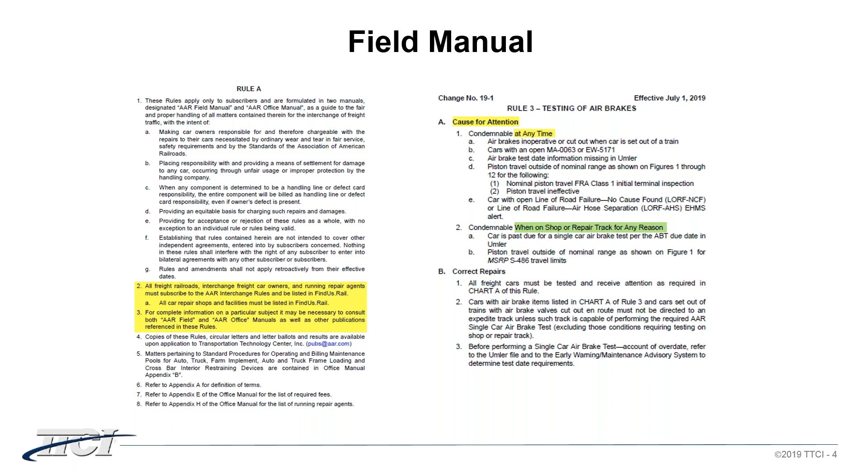Now, as we keep going through, Section B talks about correct repairs. So you've got the rules. You have Section A that tells you this is when you need to repair it. This is when it's on a shop or repair track. These are other items that have to be corrected when they're on there.

We go to Section B, correct repairs. What needs to be done? What has to be done when it's there and you're working on the car. And they may refer to different sections in the field manual, and it also may refer to different publications.

Now, we look at the rule here, Rule 3. It's telling you that when a car is on a shop or repair track, you have to do a set and release minimum, and it's telling you what the set and release is and the steps. And it tells you that if you're going to be doing piston travel or adjusting piston travel, you may need to refer to the S4009 or 4010.

It also refers to air brake tests and setting piston travel. It also refers to the S486. So there's a whole bunch of references throughout the rules. You take a look at it, and they give you discussion points. It gives you where you need to go to find the information.

If you've been doing it for a while, you may not have to go back and look at the S4009 or the 4010 because you're familiar with how to set the slack adjusters up and what it takes. So it tells you these things.

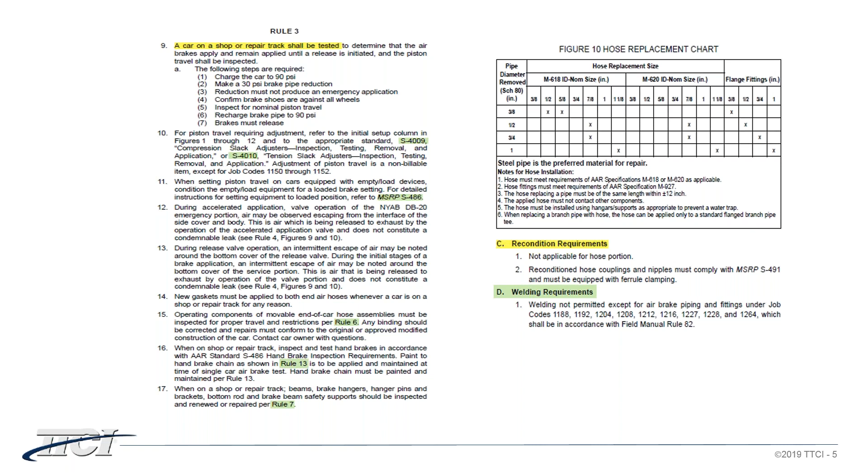And then as we keep going through the book and looking at the different rules and the different sections in there, Section E is general information. It's telling you good information, required information. It's telling you if you do this, you also have to do something else, or you may have to look at this. In this instance, I've got highlighted there that charges for truck-mounted piston travel adjustments aren't permitted.

So it's giving you instructions. If you're doing a single car test and you're adjusting piston travel, then it's not permitted to charge for that. On the other hand, it's saying that the charge is permissible if you're doing certain other things. So you kind of have to read through the rules to see the information that's there.

The general information has a lot of good stuff in there. It may tell you all sorts of different information. So as you go through the field manual and start getting familiar with it, each rule is a little different.

Somebody who tells you that they know the field manual front to back, well, I kind of question them because there's too much information to know. The important thing is to know where to go to get the information.

You take a look at the field manual and you look at the rules for brakes, the rules for couplers, the rules for trucks and all of these other items in wheels. So you want to look at what the rule says, when you have to remove it, when you have to do items on the repair track, and you also want to look at Section E and B, correct repairs.

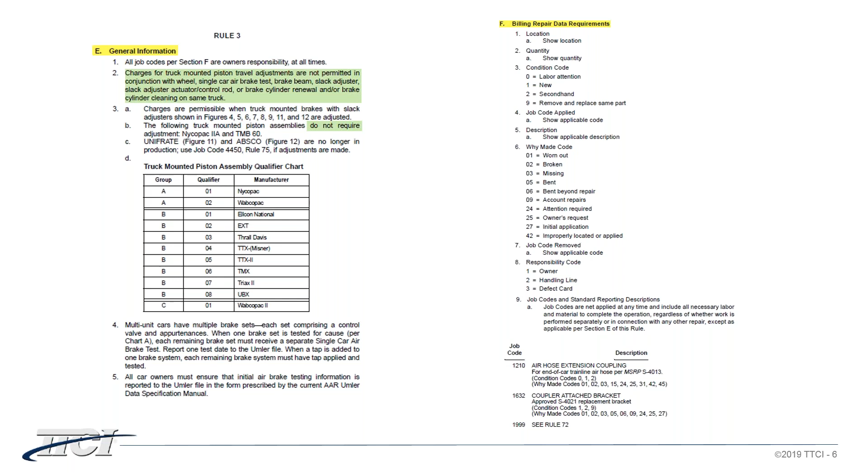We talk a lot about gauges. The AAR and TTCI have looked at gauges, and we found a lot of problems with the use of gauges, all the mandatory gauges in Rule 1. So someone came up with the idea of, well, can we put out a video just to show a quick demonstration? It's not a training video. It's just a video for reference. Oh yeah, this is how I have to do it. I remember how to do it now.

And this is just kind of a path on how to get to the demonstration videos that we've produced. You go to the AAR.com website. It'll take you to the Transportation Technology homepage. And there in the center, you'll see a tab that says Technical Services. When you click on that, it brings up another screen where you can go to Mechanical Inspections. And when you click on that, it brings you to a home page where you have on the left-hand side a couple more drop-down menus.

When you click on the field manual gauge use demonstration, it takes you to the home page on the right. And as you can see, there are some videos there. They're short videos. They're not there to train people. It's to refresh their memory. The field manual also gives you some pictures and descriptions of the gauges, how they look when they're applied. But the video goes a little bit farther. It helps you say, this is what you're looking for when you're doing this.

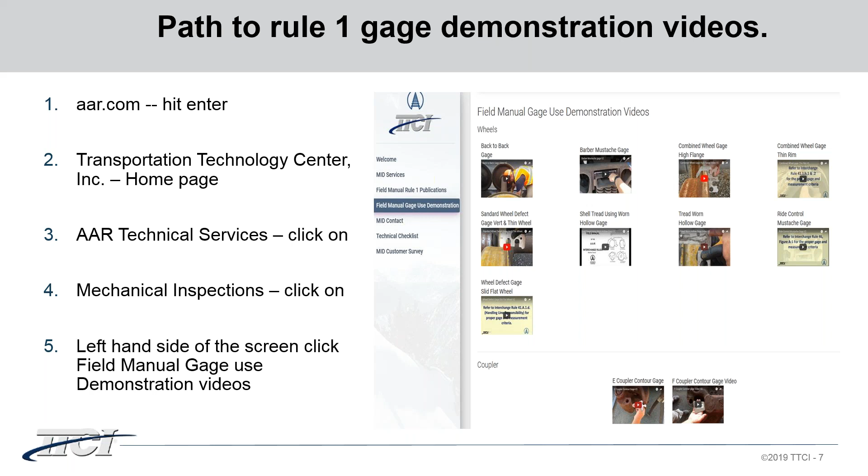One of the topics that we find recently in the field manual is information for the uncoupling levers and the lock lift clearance. There's a lot of information in the field manual, and this is a good example. It's there, and you kind of have to dig through to see what's needed. You've got fillers, you've got angles, you've got clearances. All of this information is in the field manual to help the end user, the guy who's going to be doing the repairs.

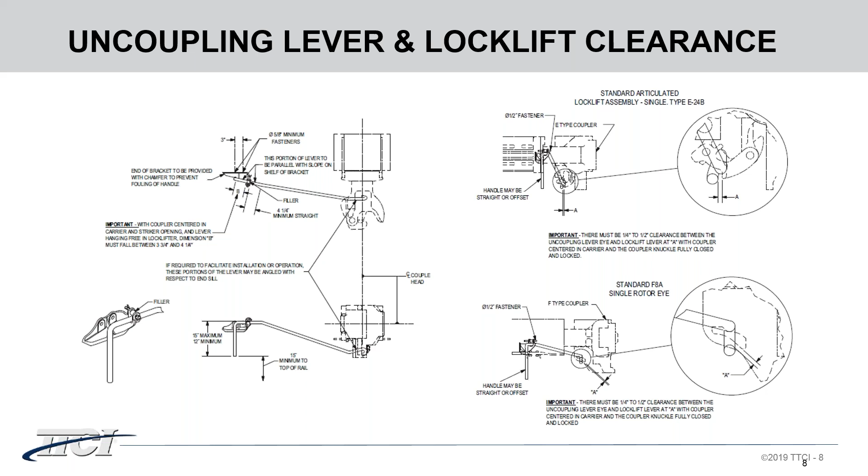It's also in the MSRPs, but this is where you really want it. This is where the person that's doing the work is going to look for the information. So as we go through, there's a lot of information, and you sometimes have to blow it up so you can read it because it is small print, but it is there to help the individual.

So we looked at this, and the castings committee said there have been a lot of problems with the uncoupling levers, lock lift clearance, also referred to as rod eye clearance, all sorts of nomenclature in the industry, depending on if you're in the East, the West, or down South. Everybody calls it something different. But the video is there just to help.

What we've done is we made a video, and we're hoping that it will help the industry. We've also made an update to this video, but this is one, and this is kind of what we're looking at. I'm going to take just a minute to show this to you so you can see what it is.

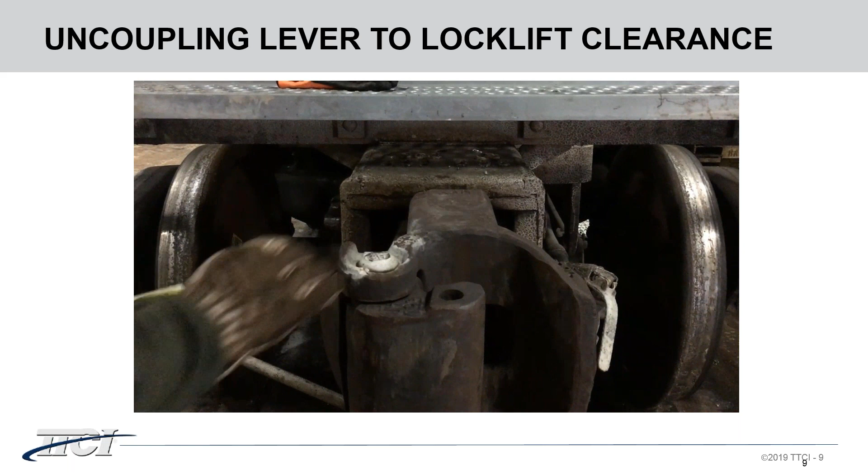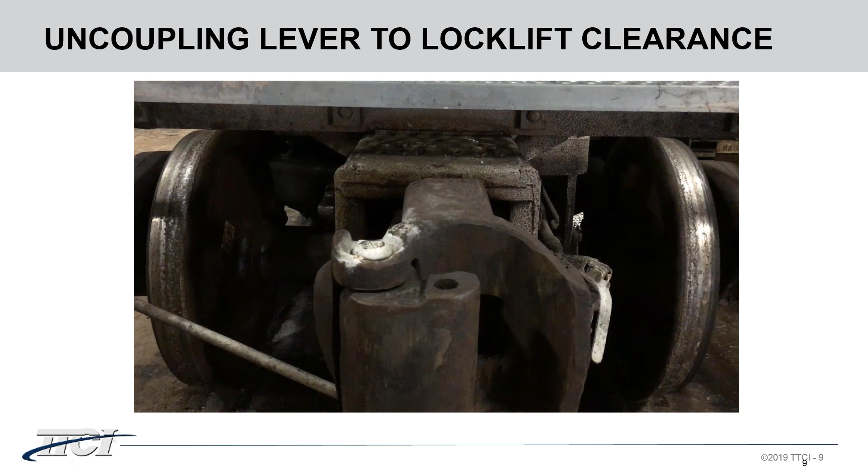So we're here to look at the E60 draft system, the uncoupling lever, to make sure it's the correct one, and the gap between the lock lifter and the uncoupling lever. So the first thing that we want to do is center our coupler on our striker, make sure it's right there in the center. The next thing we want to do is come over here and look at our uncoupling lever, make sure it's not bent, it's the correct one, and make sure it has a 1/2 inch fastener, whether it be a cotter key or a bolt.

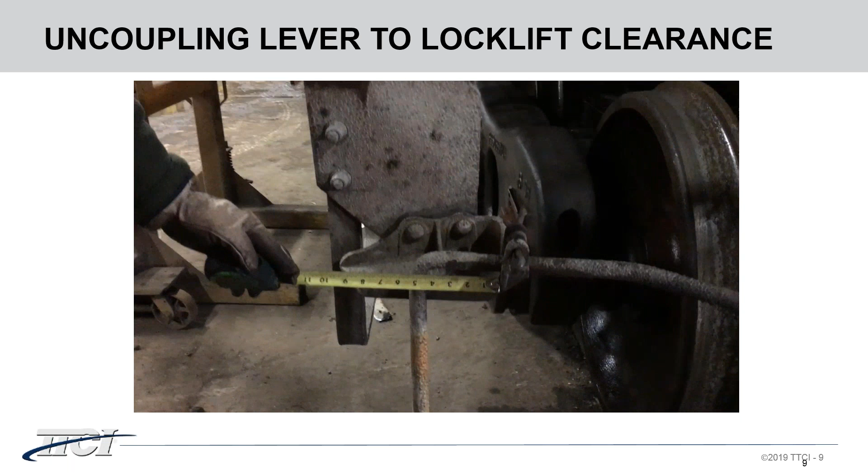The cotter key should be bent on the back side, and when it's on the repair track and shop track, it has to have the filler. So this one is correct. So the next thing we want to do is measure the distance from the bracket to the inside of the uncoupling lever. And we want to have 4 1/4 to 3 3/4, so it's right on the borderline 4 1/4. But if that was not in the 3 3/4 to 4 1/4, then we would either need to replace the uncoupling lever or adjust it. Some of them adjust, and then you have to weld it.

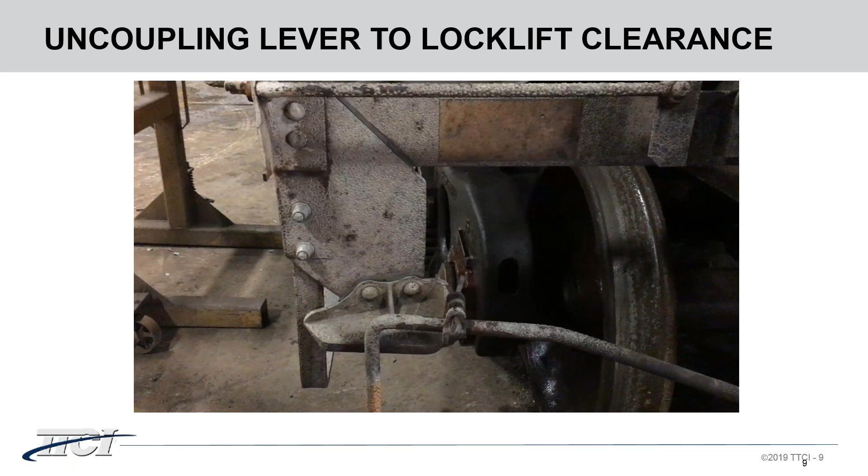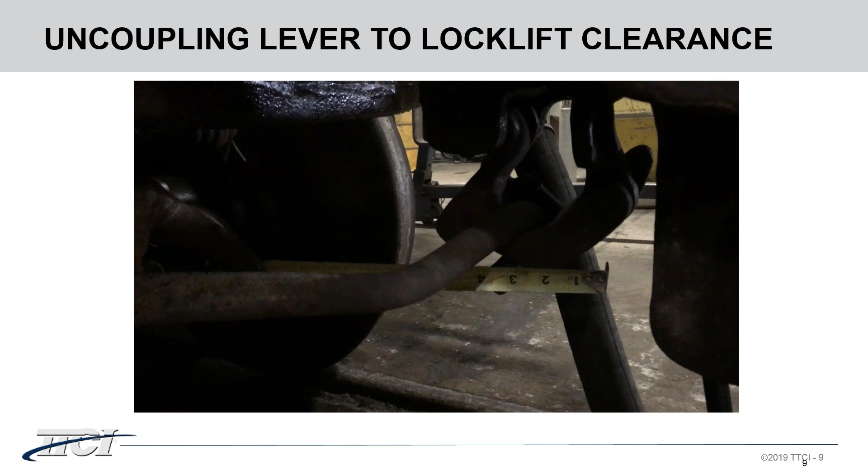So the next thing we want to do is check our gap between the lock lifter and the lock, and we're about 7/16 of an inch. And we're looking at quarter to half for that dimension. So if it's not between quarter to half, then it needs to be adjusted. These measurements are in the field manual in Rule 20.

So what we've got is just a quick video on what's going on and how to take a look at that. Again, all of these measurements, all of these items that you just saw in the video are in the rules. They're in the field manual, and you can take a look in the field manual. But a video sometimes puts it more into perspective on how to really measure it, where you're looking at this information. And we found that the videos do help, and this is one area that we're hoping to also get posted out there, either on the MID website, or Castings is talking about putting it onto their website. That's there as well.

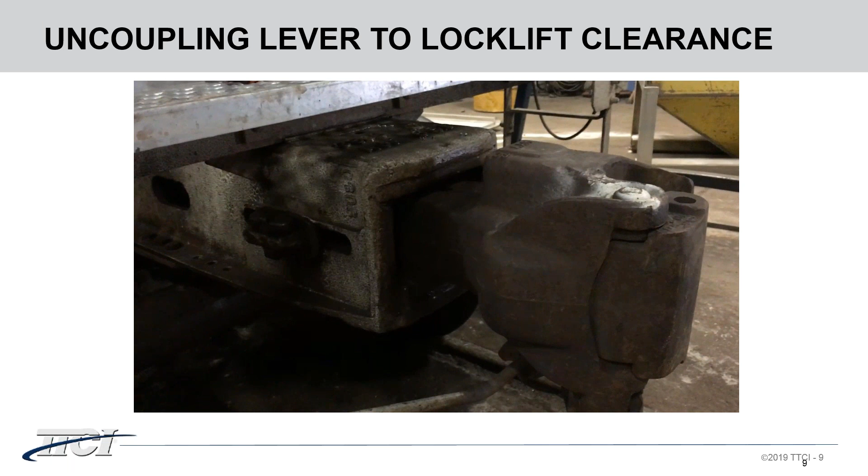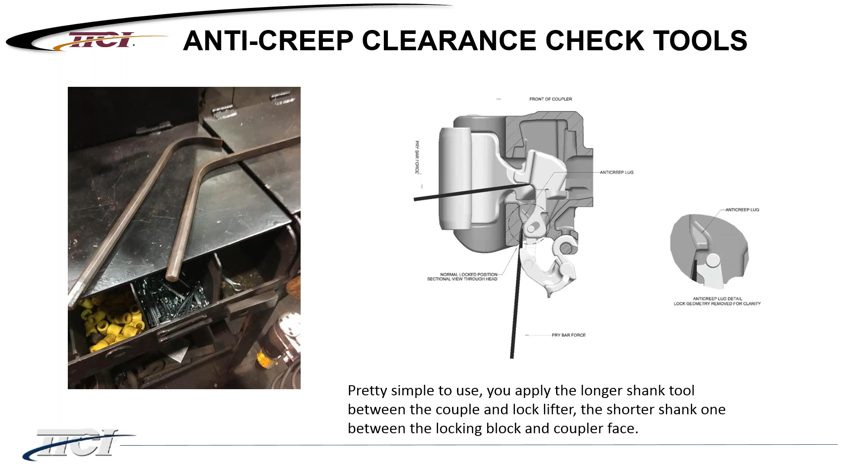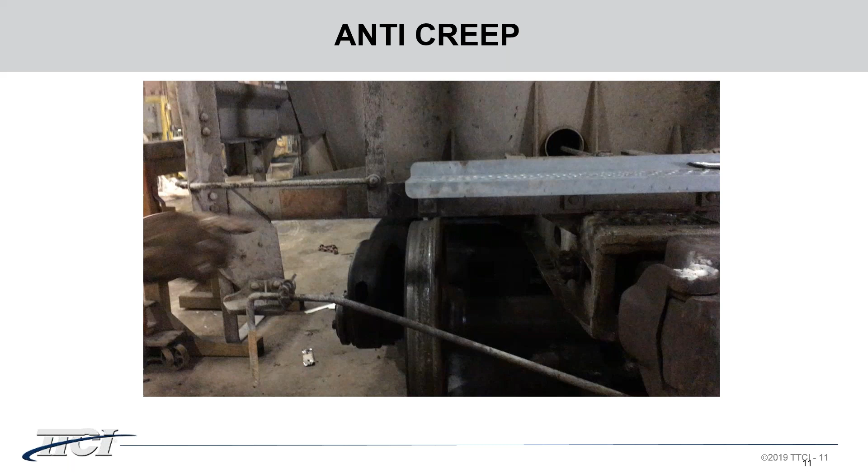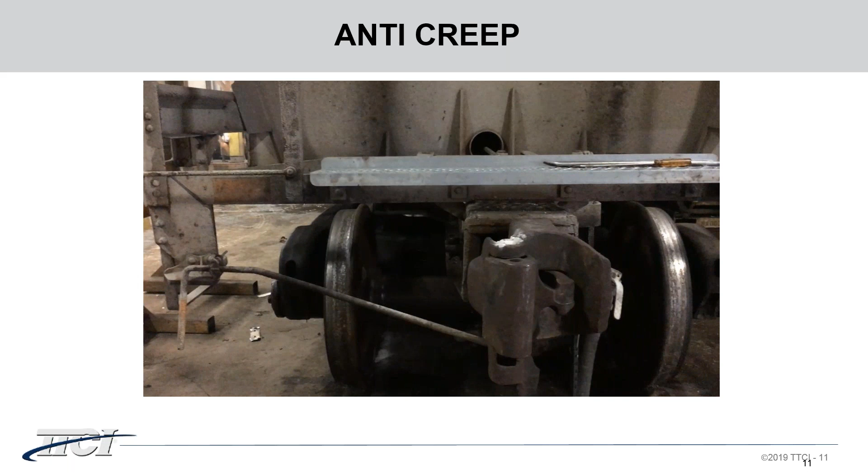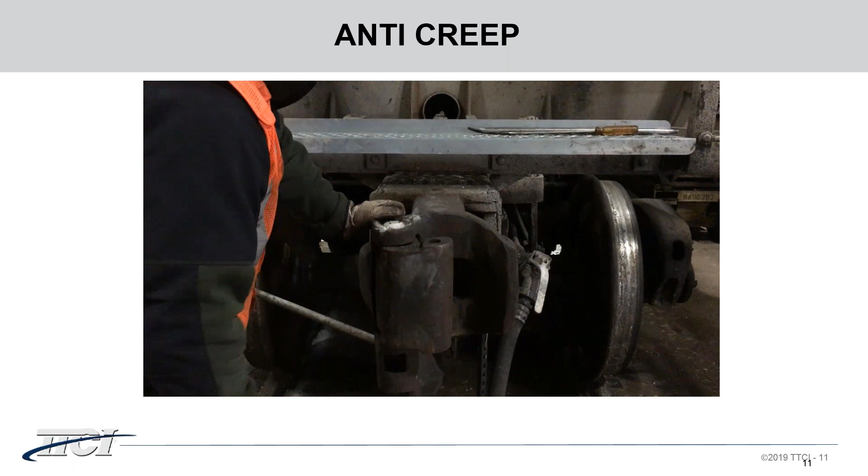And I'm going to take you through just another quick video of the anti-creep, and hopefully this will be useful for you all as well. We're going to check the operation of the coupler to make sure it operates properly, opening and closing. So we want to grab our uncoupling lever and make sure that the coupler operates fully in full open position, which it did. The next thing we want to do is close it and make sure our lock drops all the way to the full lock position. If it doesn't operate properly, then you can use dry lubricants to certain points of the lock and the thrower and the knuckle, and then try it. And if it still doesn't work, then we could replace some parts.

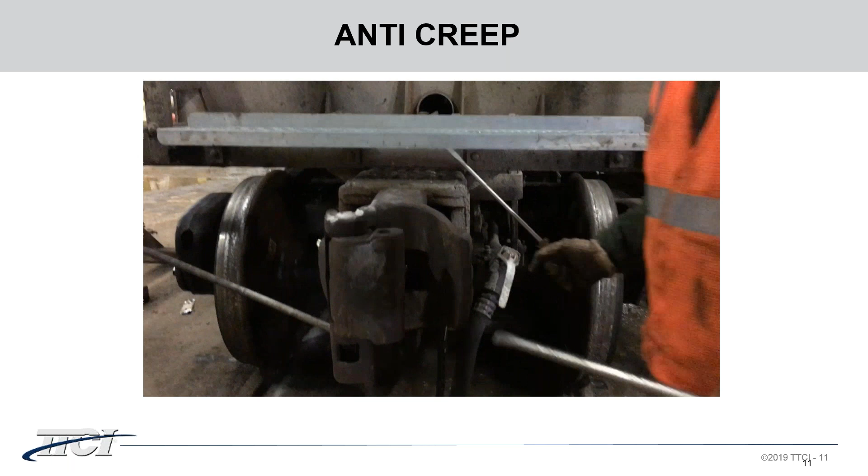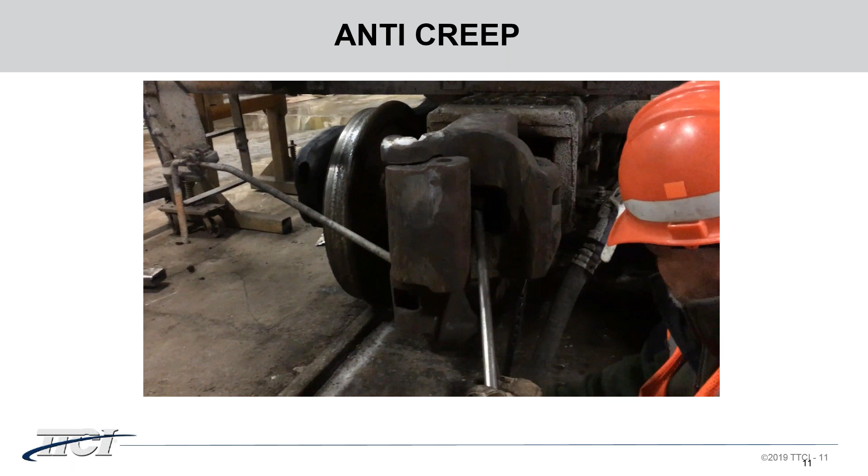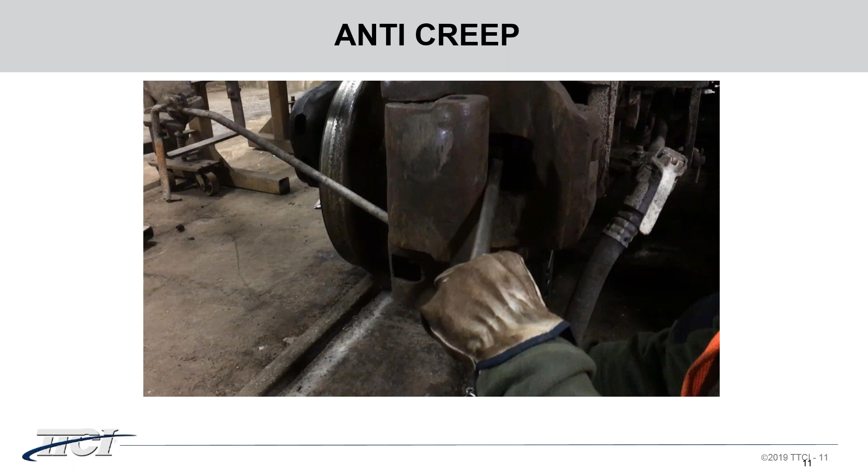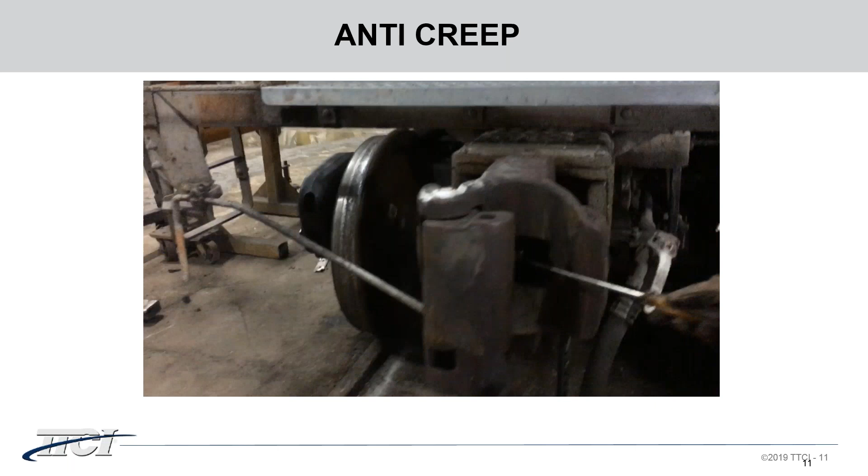The next thing we're going to do is check our anti-creep. So you need a small pry bar and a straight screwdriver. And we're going to put the pry bar in that little spot on the knuckle. Put the screwdriver under here on our lock. While prying up, I'm going to force the lock back, and it shouldn't open enough where the knuckle should open. If it does, then we need to change our lock lifter first, lock second, then the knuckle, or it could be all three until it works properly. All these things that I showed you are in MSRP Section S, Specification M212, Appendix D.

So again, the information is out there, and certain MSRPs are there for reference. The videos help. The drawings that they're adding into the field manual also help. It gives you a better idea where to place the bars when you're checking this. This information is in the field manual. It's there to take a look at.

So as we go through the field manual, again, this is just checking operations for anti-creep. There's also other items in the field manual that are there for looking at. I mean, you got to gauge your wheels. You got to check your clearances on your side bearings. There's all sorts of information and all sorts of publications that they send you to, but we try to make it easy so that everybody can find useful information there.

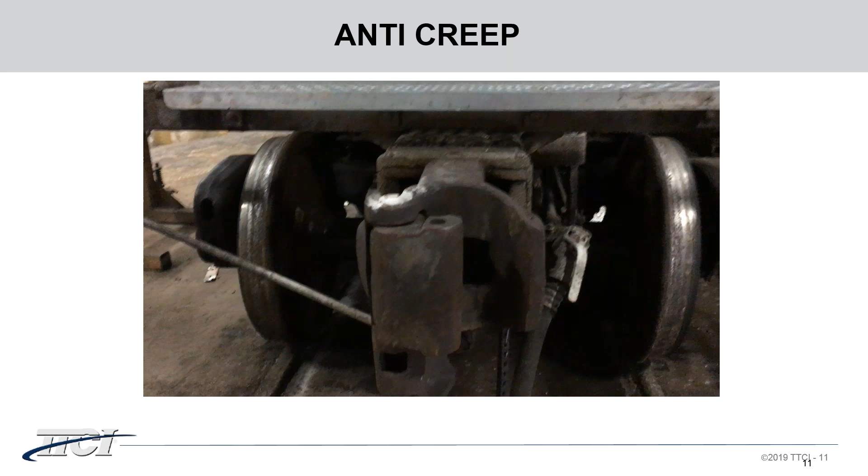One of the things that we look at and the inspectors do is we use a checklist. If you're starting up a facility, it's a great idea to have a checklist. You may want to get out there every 6 weeks or so and just do a check on the facility to make sure that they're doing what they're supposed to be doing until everybody gets it into their mind, and then you may not do the inspections as often. Maybe you kick it back to once a quarter and then twice a year or something like that.

We use checklists for consistency and to make sure we don't miss anything. And it's a great idea to do that as well when you're starting up a facility, whether it's a repair facility, a wheel shop, or an air brake shop. There are checklists available. We put some on the website. Also in the MSRPs, they have checklists, and a lot of that information is right there to take a look to make sure you're in compliance.

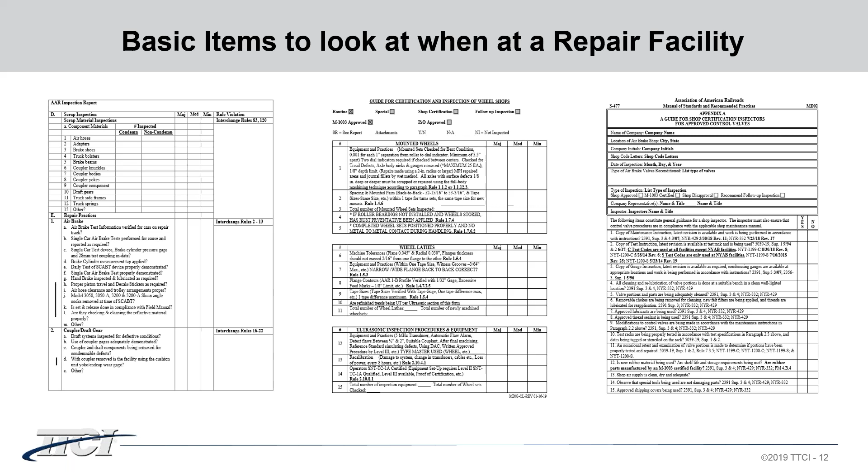Another area that we find problems with are cars that have been repaired and they're released. So we take a look at the outbound cars coming off the repair tracks, and people don't always look at the field manual. They aren't reading the field manual that says to check this or check that, or this is the proper item to replace. So they miss stuff.

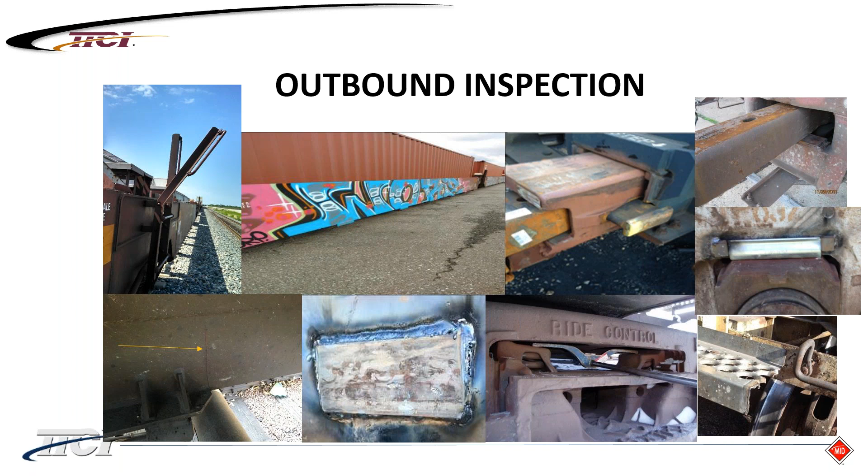Material storage is another area that we find a lot of problems with, and it's an easy fix. It's things that you take a look at. There's requirements in the field manual. There's requirements in the publications that are required for you to take a look at and have these things, cover the ends of it. We've had this nice cold snap that came through, and if the air brake valves are uncovered, water can get in there. Now you've cracked the housing and the valve's no good.

Wheel storage, it's the same thing. If you're not storing the wheels properly, you're going to end up dinging the axles, chipping the bearings. All this stuff adds cost to the industry, and it adds cost to your repairs.

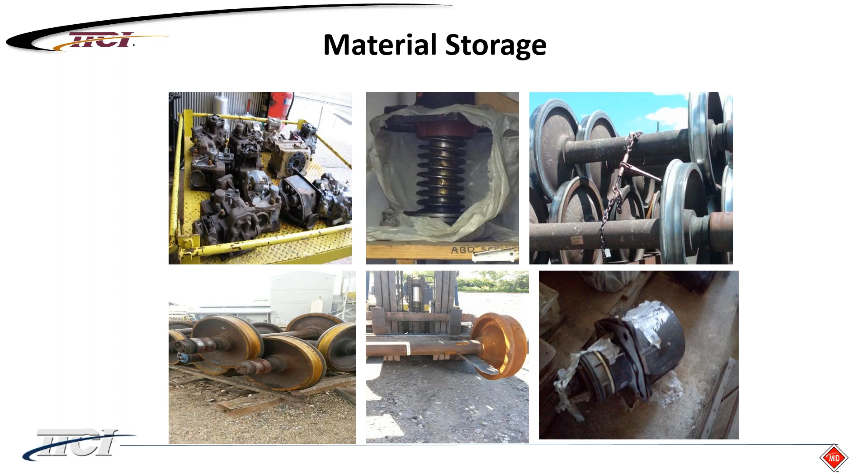So we look at the office manual. The office manual is the base for the AAR billing. It has labor rates, it has scrap rates, it has material costs and billing codes. It also has general instructions on how to bill things and where to look for other items.

There's a lot of information in the office manual that isn't in the field manual, and sometimes they're in both because it's that important. But it talks about little things in there. It talks about location for AEI tags. There's tie down and load restraints. There's trailer hitches and parts. And then it has the billing information, the codes, and what you can get for the change of the part.

The field manual and office manual, the repairs and billing was not set up to make a profit. It was set up to cover the cost of the repairs. The cost should be the same for Bob's railroad as it is for Jeff's railroad. If Jeff's stuff is on Bob's railroad, it should cost him the same as if Bob's stuff was on Jeff's. And it's the minimum repairs to keep the car going. So it never was designed to make money. It's just there to cover the costs.

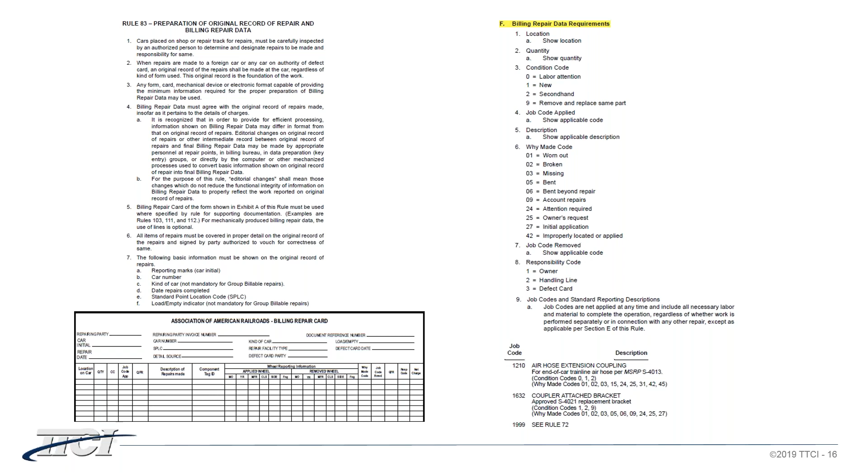And as we go through the office manual and the field manual, Rule 83 in the field manual talks about requirements that are needed for billing. We talked about this earlier. Rule 83 gives the information of what's needed, and Section F deals with requirements. The office manual gives you the prices and everything.

The office manual also gives you service fees. In Appendix E, there's costs for certain types of inspections, M1001, M1002, M1003, your tank car, your car manufacturing, your quality assurance. It also has costs in there for routine inspections, tank car inspections. So all of this stuff is in there. And it's good information in the office manual, so you're not surprised by any prices or anything.

The other item that's in there is when you are looking to do extended life or increased life status or rebuild, Rule 88 in the office manual gives you all of that information. It's in the office manual because it doesn't need to be in the field manual. You're not going to be doing those type of repairs all the time. It's specialty, and it's in the office manual so that you can look at it. You can see what's required to do under the repairs. And it even has a checklist in there that's about 5 pages long or so. So there's all sorts of stuff in the office manual that's there for everyone to use.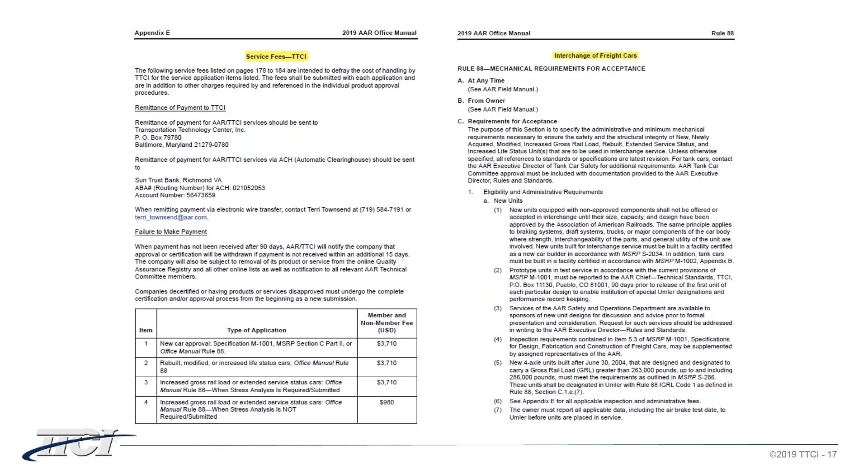The other items that are in the office manual that's good to know is it tells you about service interruption. It tells you what's allowed, what isn't allowed. Transfer or adjustment of lading between carriers. You got a problem with loading and there's something that has to be done. The information is in there. It tells you a couple ways to do it and a couple ways to bill for it.

UMLER information, how to report it, the procedures on how to do it. Equipment health management, what's there, how do you get to it? Here's some links, this is what you got to do, this is information, and it's required in the field manual. Here's how you get to it. It also talks about defect cards, the preparation in DDCT, and it gives you links and other aspects on what is needed information for that and for filling out that information.

Now, how to handle destroyed and damaged equipment, how much your time limits are on there. It also tells you how the pricing is figured for the office manual. And it tells you when you're doing the billing data, what the requirements for the billing data are and how to get to it and what websites and links are there for that. So there's a lot of different information as you go through it that's not really needed in the field manual, but it's needed for the person that's doing the billing, or general information that doesn't happen every day out there in your handling of damaged and destroyed cars.

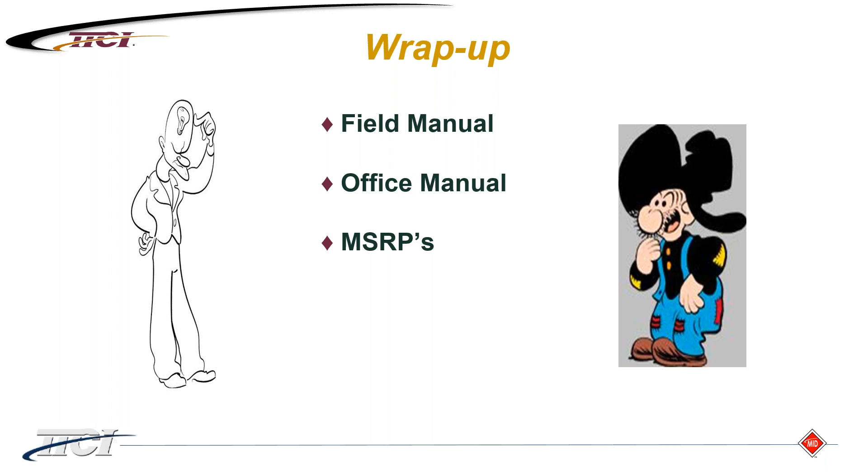The MSRPs, they're there. They may be needed at a facility. They may not. It all depends on what you're doing and the type of repairs you're doing. But there's a lot of information in the MSRPs that the field manual refers to, or the field manual gets its direction from as well.

Gauge use. It's really important for the facility to know how to use the gauges, to be familiar with the gauges, to understand when they need to get them out and take a look. Part of the inspection of the car when it comes in, you're going to need gauges out there. We want to see the gauges be used. You need to use the gauges because there are going to be things that you miss that you think you've got an idea about, but the gauge helps you really clearly understand.

Billing and forms. You've got to look at the billing. You've got to understand the parts that you put in there are correctly billed, that you got the correct parts, that you're using the right why-made codes, the right job codes, all of that information. The forms that need to be filled out, whether it's the MD115 or MD11, whether they're online or hand paper copy. These are all things that a facility needs to know and needs to take a look at.

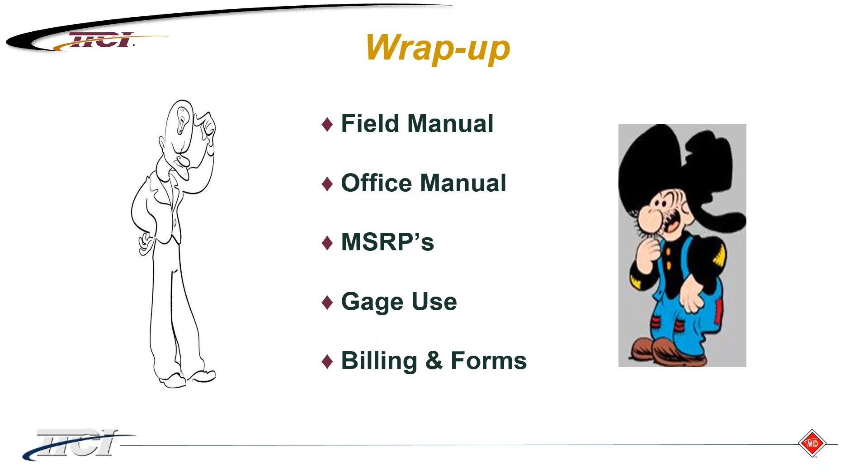And that's it. I'll open it up for questions for Nicole. All right, thank you, Steve. I did see a couple questions come in.

One of them is, are the field and office manual available electronically? And the answer is yes. If you purchased a subscription to the field and office manual, you should have gotten an invite to download a copy this year. It was complimentary as we just got it out there, but effective January 1, you will have the option to either purchase paper copies like you do today or electronic copies.

Now, one thing to note about those electronic copies is when you purchase a copy, that copy is tied to one user on one device. So you can't have one copy and use it on 5 different computers. If you want it on your laptop and your phone or your tablet, then you would have to have 2 copies.

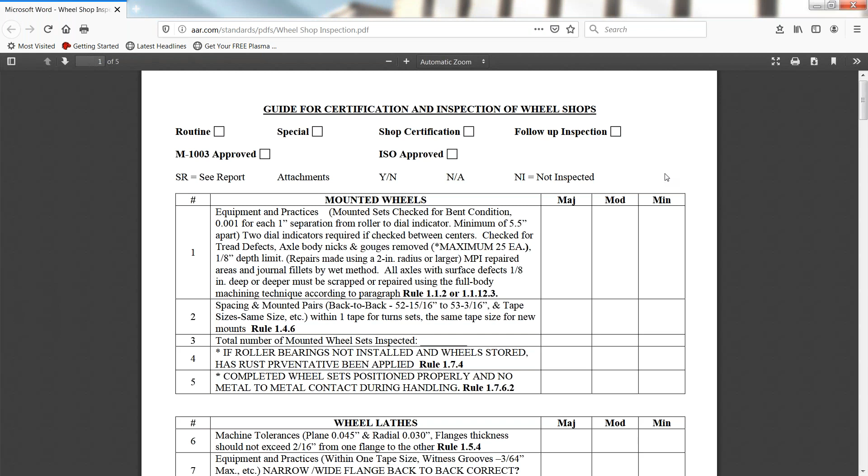There are other checklists that are in the MSRPs themselves that we go through and use. And let's bring up Wheel Shop. So a lot of this information out of the Wheel Shop is right out of the MSRP. They have these checklists in the back of different sections, and you'd be able to access that. Some of the MSRPs are electronic as well. If you have a subscription to the electronic versions, you can go through and download all of these.

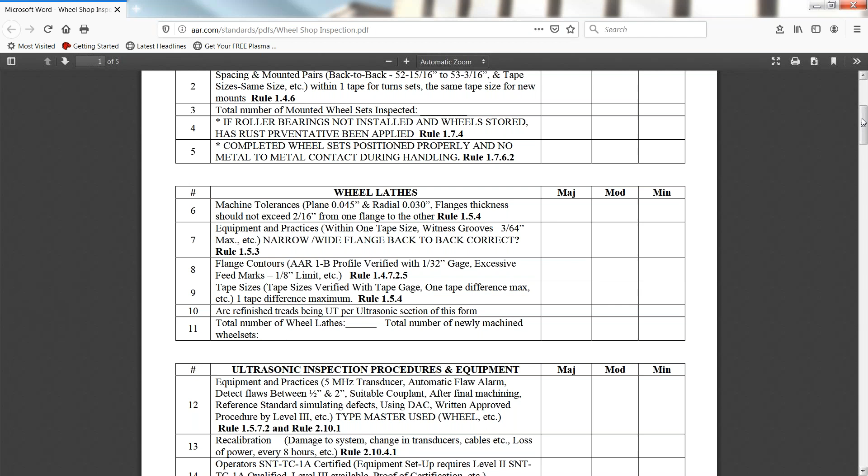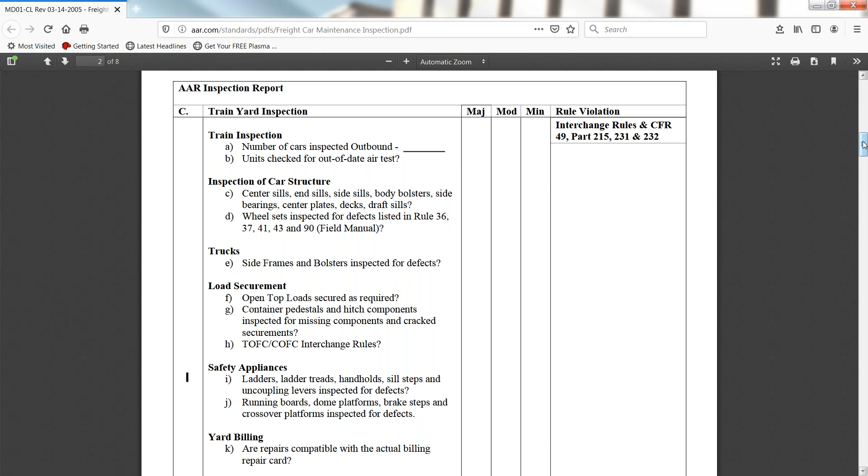So they're in two places. We try to make the freight car maintenance one right here. It's 8 pages long. This is directly what we take a look at and what we use. It has rule references, CFRs, different things that are in there that we refer to where we're getting the questions and the check items. We look at scrap, obviously. We want to know if it's good or bad. And when I mean good, it's legitimately removed for a reason.

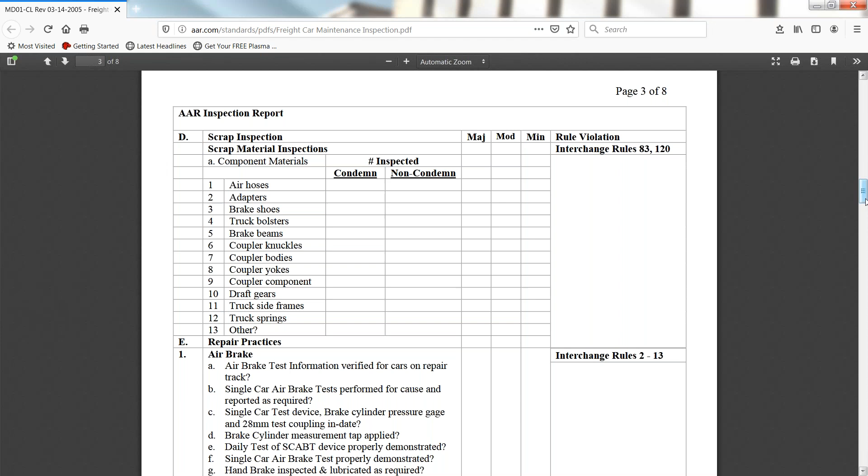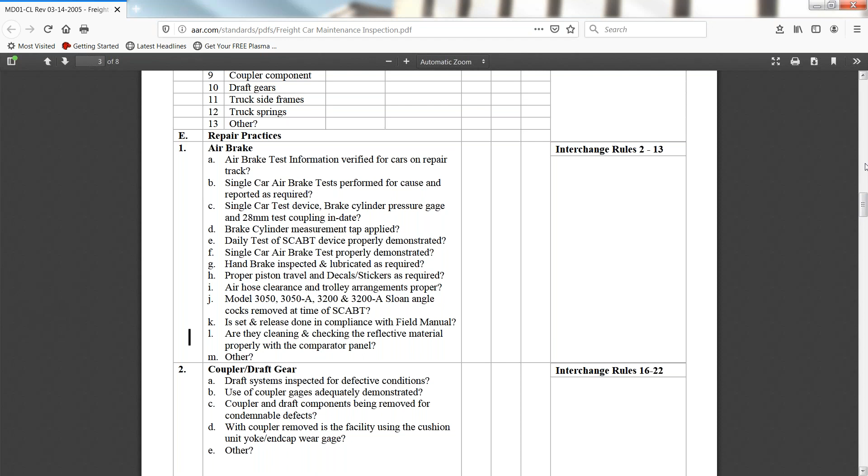Air brake items, you know, we're looking at, did they perform it correctly? Do they have the right publication out there? Are the trolley arrangements proper? All sorts of different things like that. We've got the running gear, why were they removed? A lot of the why-made codes we put on there because it makes it easier. Rim thickness. You might be really good at billing and you guys might know this off the top of your head. Not me. I need those references in there.

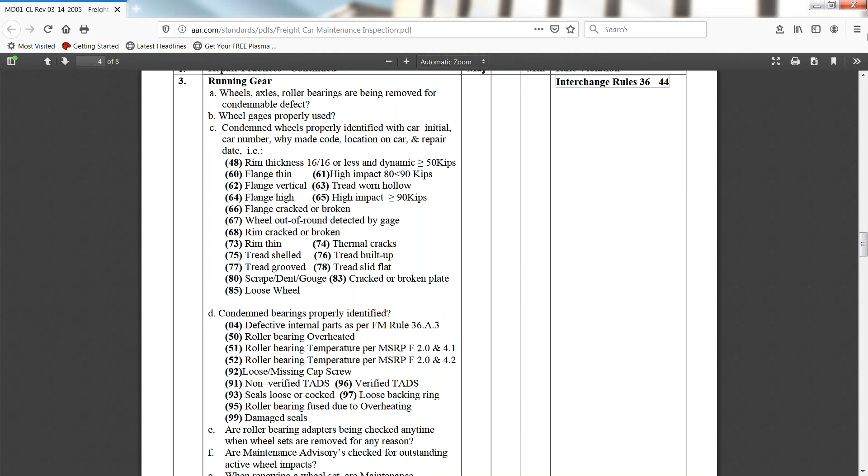So these lists are available there. And we try to keep them up to date. But some of them are in the MSRPs for like air brake shops and that. The checklist comes right out of the back of the MSRP. The intermodal comes out of the MSRP section I. The 970, 992 is out of the MSRPs as well, I believe.

So they're there. You can find them. If you have any specific one that you want to take a look at, we'll try to lead you to the proper place. We'll gladly take any emails or comments on it. Back to you, Nicole. All right.